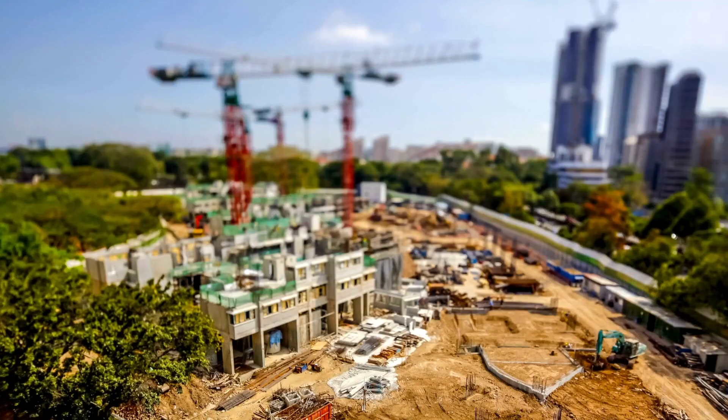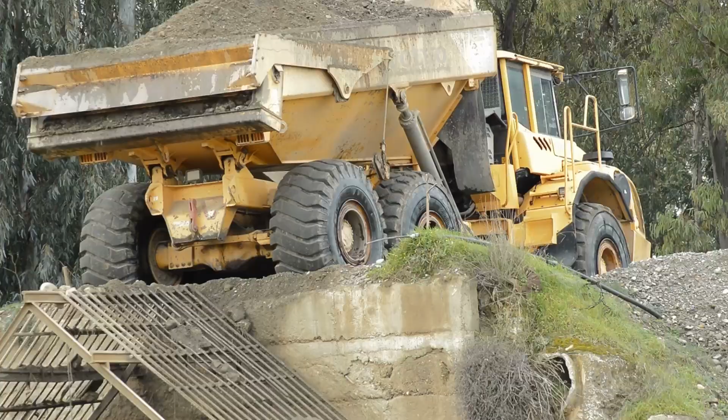As we work together to build a more sustainable world, decarbonizing the construction industry is not only a pressing priority, but one that poses significant challenges due to the sector's heavy reliance on energy-intensive processes. Traditional construction methods, materials, and machinery all contribute to greenhouse gas emissions.

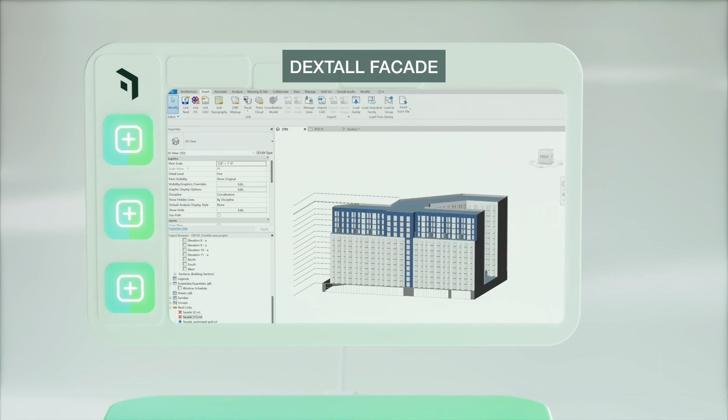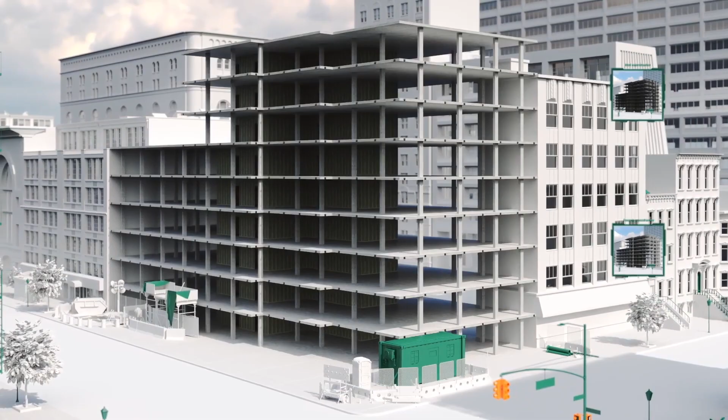The result is state-of-the-art design assist software that integrates building information modeling and offers a project data platform for optimization. This technology significantly accelerates the design and construction process, reducing concept to installation timelines by more than 80% and lowering overall costs by 15 to 20% compared to traditional on-site construction.

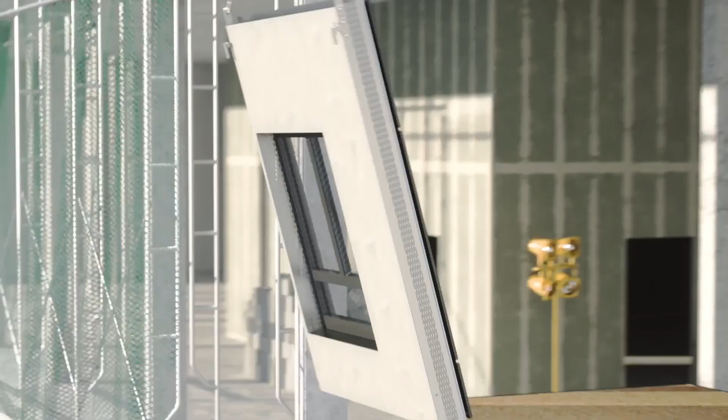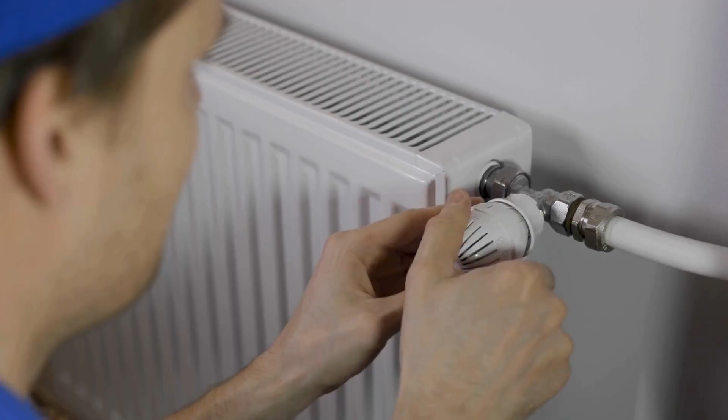Dextall's prefabricated exterior walls are a game changer too, for both new construction and retrofitting. These walls are designed to be energy efficient, outperforming standard energy codes by up to 40%. This improvement in thermal performance is crucial for decarbonization, directly reducing the energy needed for heating and cooling buildings and thereby cutting down on greenhouse gas emissions.

Requiring 20 times less on-site labor, Dextall's prefabrications further reduce the environmental impact associated with more general construction activities.

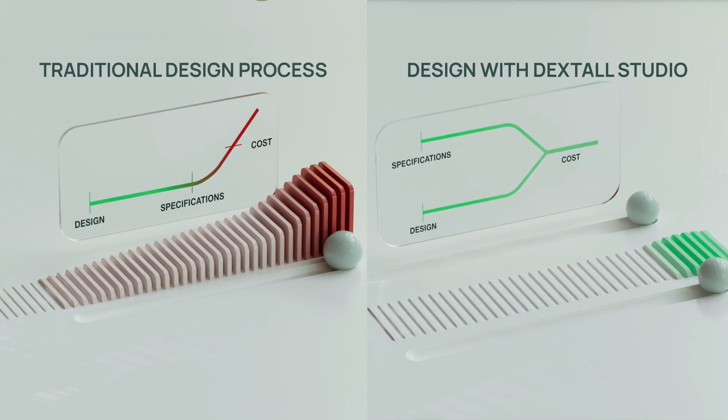For me, sustainability goes beyond rhetoric. It's an actionable ethos at the heart of every decision I make. Dextall stands as a testament to how businesses can drive real change, merging cutting-edge technology with steadfast environmental responsibility. Our innovative approach is reshaping the construction landscape, fostering a more sustainable and resilient built environment. Beyond just achieving business success, we're committed to building a legacy of sustainability for future generations.

To create a sustainable tomorrow, buildings today need to get so much better. After all, there are better materials, better technologies, and better processes. Bringing all of these aspects together isn't easy. But what meaningful things can be built in life without facing meaningful challenges too?

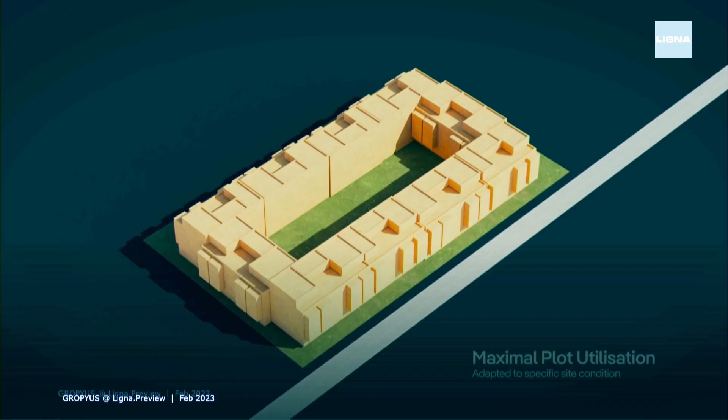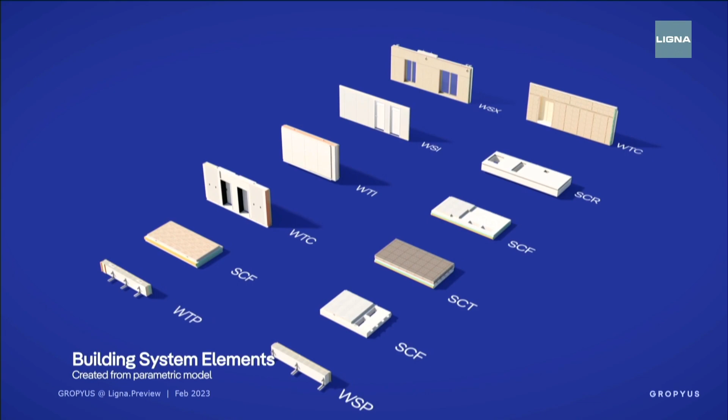This is the philosophy and inspiration behind GROPYUS, an innovative development company co-founded by Bernd Oswald. With its aim to make sustainable living accessible and affordable for everyone, they're quietly reinventing multi-family housing, adopting a fully integrated end-to-end process. Buildings are thus designed ready for construction, saving significant amounts of time and money while also leveraging all of the time, cost, and environmental advantages of serial prefabricated production.

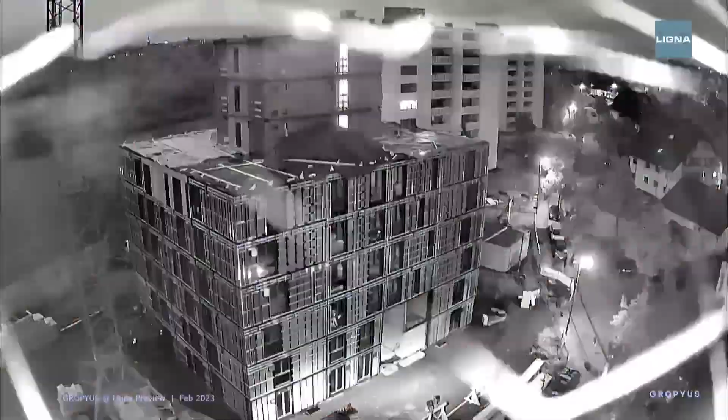Building and assembling them takes twice as fast with double the precision. Harnessing the benefits of smart technology, the company has been able to rise just as fast as its developments, all the while reducing costs and, most importantly, their emissions, aligning with the most ambitious sustainability goals in the world.

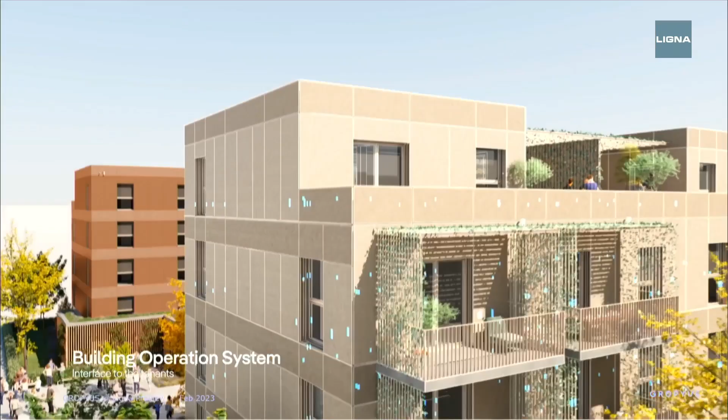These energy-positive buildings will soon harvest more energy than they use, becoming part of a distributed energy system of smart grids that feed excess energy back to the local network.

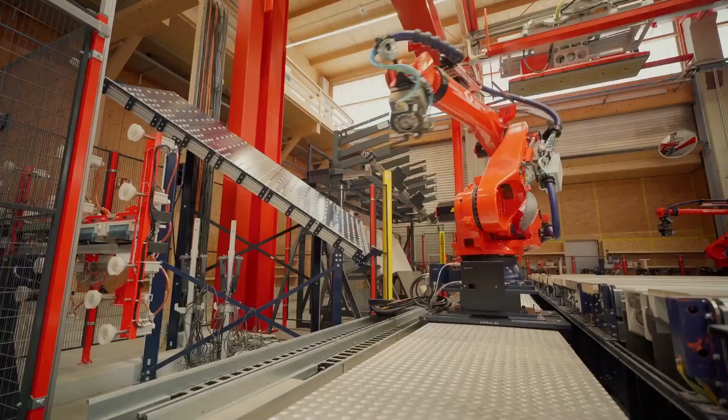Fostering biodiversity instead of destroying it, GROPYUS's business plan and decarbonization roadmap estimates a total carbon savings of 3.3 megatons of CO2 emissions for all buildings constructed by 2030. Looking at this from a personal carbon footprint perspective, a person living in a GROPYUS apartment in Germany would reduce its annual carbon emissions of 7.7 tons by a full 1 ton.

With a vision to take their business global and significantly expand their production capacity, creating sustainable living for everyone is increasingly within our collective reach.

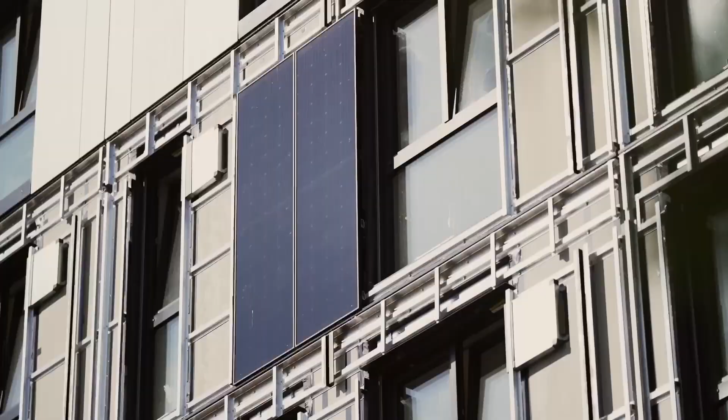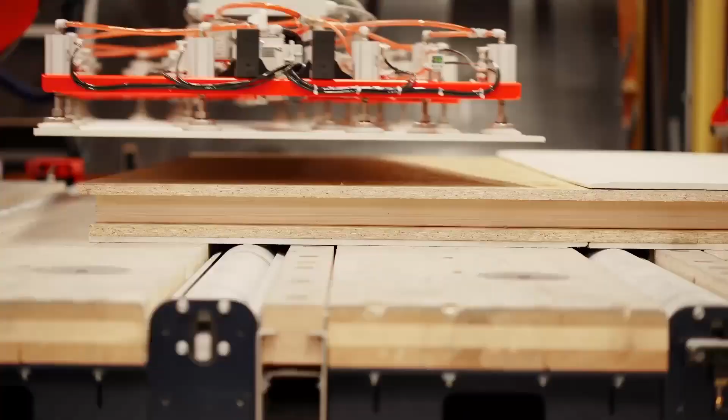Find the right partners that help you scale. There are some individuals and companies out there who have truly understood that sustainability is key and that the industry will change. In fact, it's changing already at an accelerating speed. So my advice is to find those folks and partner with them to make a real difference. Together we can do so much more than we can do on our own.

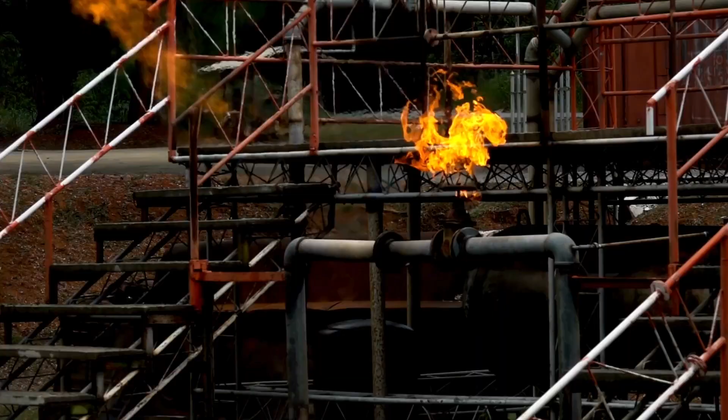Growing up with a property developer as a father, Iranian-born Nushin always felt drawn towards the construction industry, first qualifying and working as an architect before later graduating as an environmental engineer. After cutting her teeth as a consultant in the fossil fuels industry, Nushin stepped out and started her own company in 2016, Paxon Energy and Infrastructure.

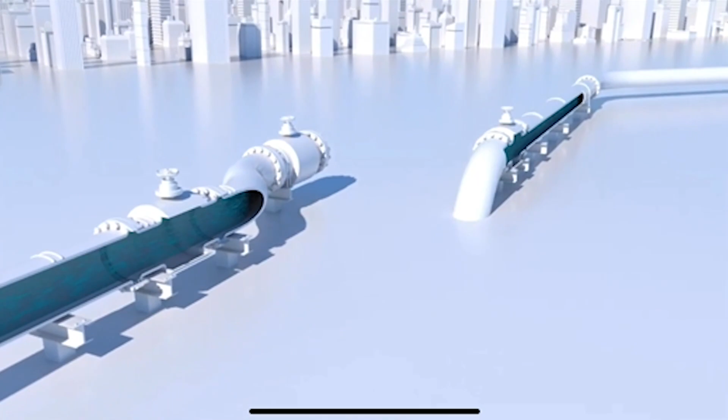Specialists in providing the technology and tools for major oil and gas producers and utilities to recapture their harmful methane emissions, Paxon is proof that regenerative innovations can have a net positive impact for all parties involved.

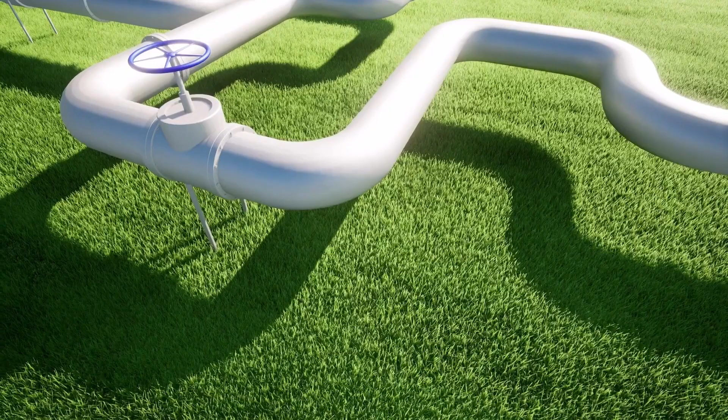As one of the fastest growing companies in the US, Paxon is on a mission to galvanize some of the globe's historically worst emissions offenders to not only recapture their methane gas byproduct, but then put it to good use as a renewable source of energy. With major oil and gas producers already committed to reducing their emissions, Paxon's recapturing technology helps to recover 95 to 99% of the natural gas that would otherwise get burned off or released into the atmosphere.

Instead of fearing failure, I recommend thinking of it as a data point. It doesn't need to be a setback as much as a step forward towards greater refinement and improvement. Remember, fate is what happens to us. Free will is what we choose to do next.